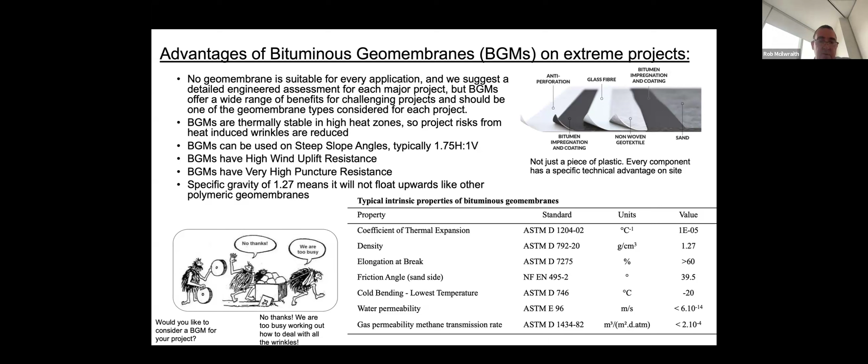Just a bit of a laugh there, but showing you some comparison between a polymeric membrane on the lower side of that project, and then the Coletanche BGM on the upper side, which is much steeper and also not having any of the wrinkles like that.

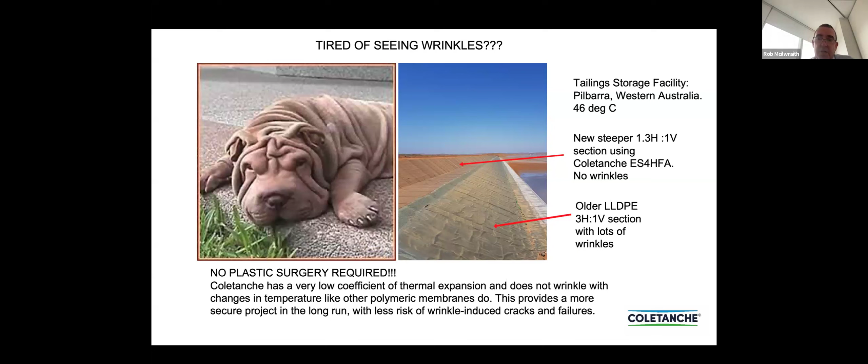This is an extremely hot project, 46 degrees Celsius. This is that same project in the Pilbara, very hot conditions, extremely hot and extremely steep. That particular slope is 1.3 horizontal to 1 vertical, so very, very steep.

In this case, it's a high friction angle variant where you remove a siliconized plastic sheet on the underside, and that sticks to the subgrade, so you can go very, very steep on these type of projects.

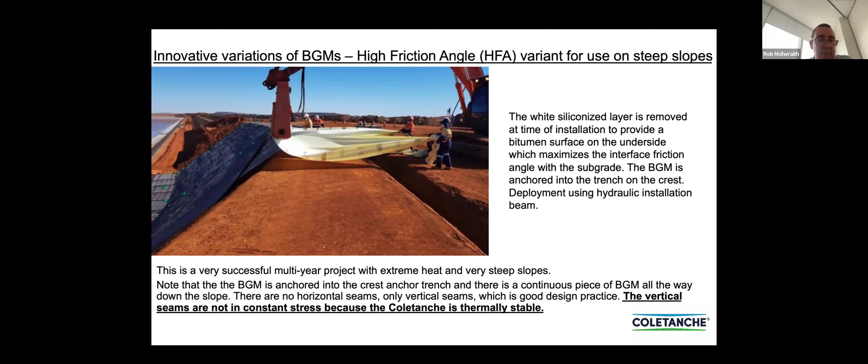Just another interesting example that we're seeing. This is a project that's been going on for quite a few years, right here in Australia. It's got more than 1 million square meters of Coletanche in it.

And you can see the steep slopes there - those are 1.75 horizontal to 1 vertical. You can see the people walking on the slopes. The sanded surface is really good for that, it's non-slip, and that obviously adds to the safety on the site.

In all these cases, all the seams you can see there in the center of the picture, that's a seam. They're all running straight down the embankment, so they are not under constant tension, even though there's high temperature.

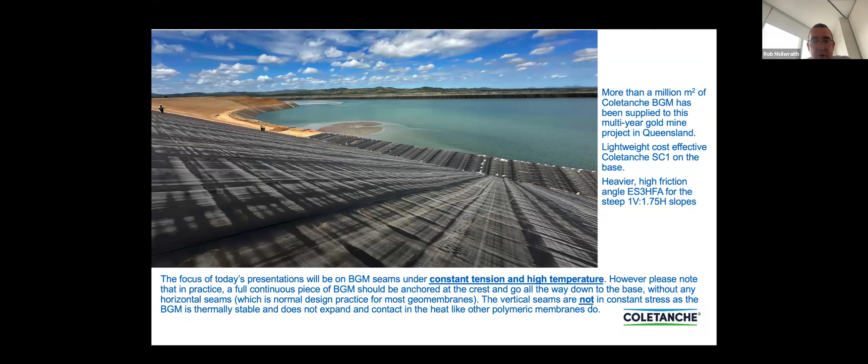Just to show you a few other projects around Australia, on the top left you'll see a project in Tasmania - you can see how easy it is for the workers to work on these steep slopes. On the top right, you'll see a project that's in central Queensland.

Very hot conditions - I've actually been on site there when it was 49 degrees Celsius in a heat wave. And that particular project is working beautifully, still 10 years down the line. On the bottom you'll see the Coletanche ES3 - these are big stormwater retention ponds. They're working beautifully. The BGM is selected because of its puncture resistance, thermal stability, wind uplift, and high specific gravity.

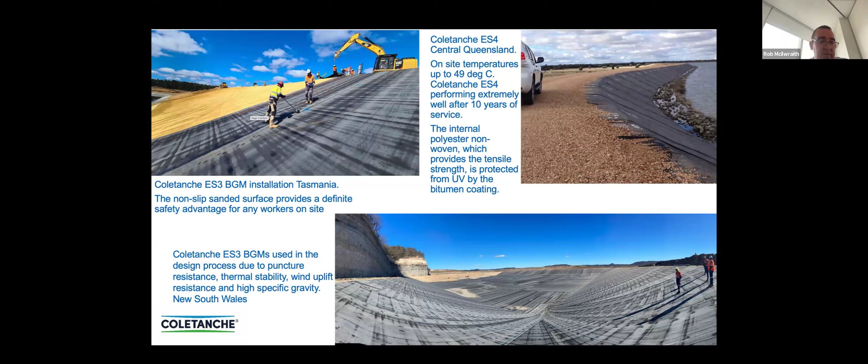We're going to be talking a lot about seams today, and there's a whole science behind the seams, and it does depend on the mixture of the bitumen that's in the seam. Obviously it's not just bitumen in there - there's a whole lot of additives as well, including SBS and some calcium carbonate, which stiffens up the mix. But it all depends on the composition of that. Bitumen is probably 50% of the mix, but it's a tried and tested method over many years.

So the typical one is a flame torch with a roller, and then you've also got electric welding machines. Both of them are working well, but typically you would like to see some flow of bitumen from the seam to ensure that you've got good coverage across that seam.

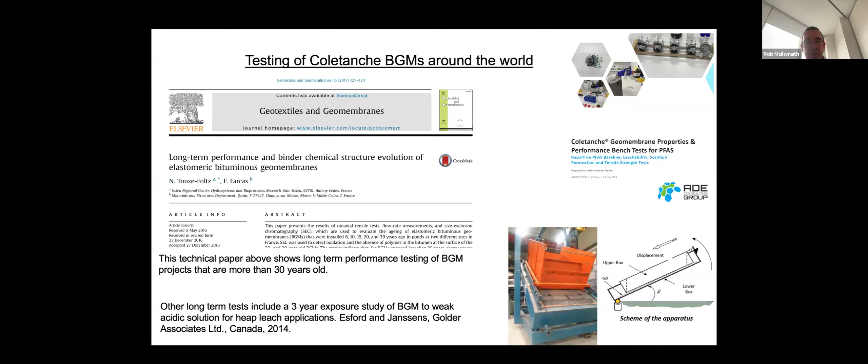Just to show you some testing that's been done around the world. We love testing that's been done - some of it's very favorable to us, some of it's challenging, so that's fine, we'll take it and we'll improve from that. But some of these tests show the long-term performance of BGMs over 30 years, and testing to other chemicals as well. So there's lots of tests, interface friction tests as well.

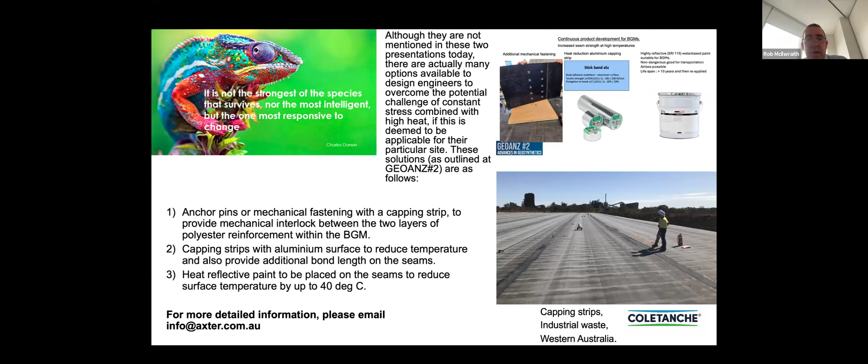Other ways to combat the problem, if you see it as an issue on site, is to reduce the temperature, which you can do with aluminium capping strips. Those capping strips reduce the temperature considerably, as well as increasing your bond length for tensile strength. You can also use highly reflective paint on the seams if you want to reduce temperature significantly. So there are lots of different ways to do that.

In general, BGMs have been used very successfully on lots of challenging projects around the world for more than 30 years. Thank you for your attention.

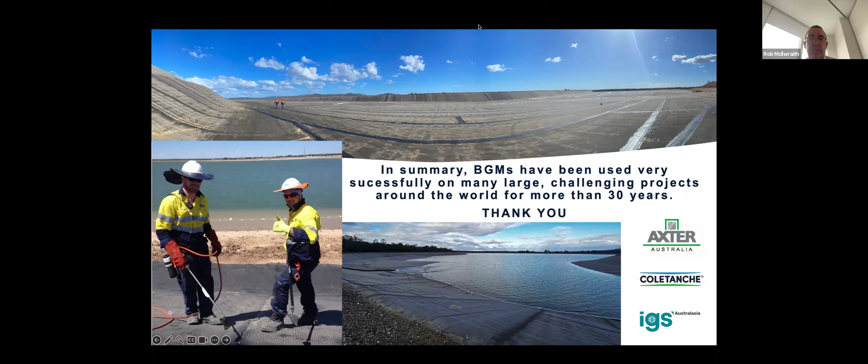So, am I sharing the right screen? Yep, okay very good. Thank you, Rob, for the introduction, so we have a good overview of the different projects, etc. So that's good. So again, I'm doing the first contribution, and Kerry Rowe will do the second contribution. So voilà, that's how we split the work.

So why did we work on this study, on BGM seams and seams in general? A lining is only as good as its seams. If the seams are failing, the lining is not going to work. So it's really something which has to be understood. We've been working in the geosynthetic industry a lot on polyethylene seams, and I'll come to that after.

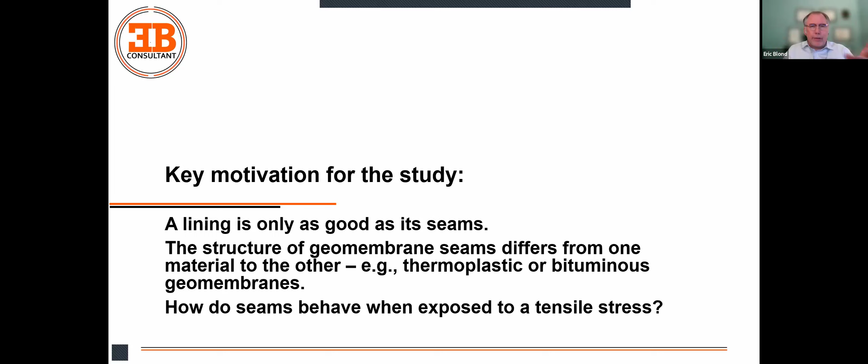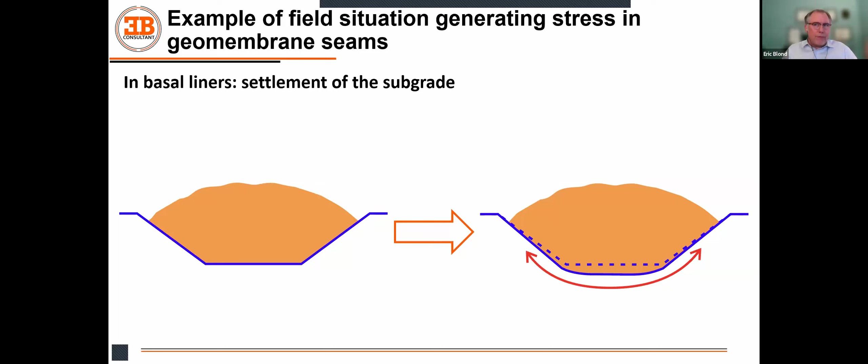So in which situations can we have tensile stress in a seam? In basal liners, one obvious one is if you have settlements of the subgrade, this will create an elongation of the liner overall, of the lining, of the line which constitutes the lining. Obviously that will create stress because of the elongation of the liner. You can also have settlement of a capping system - if you have settlement, you will have movements of the liner, they're going to move one against the other, and that will create again tensile stress somewhere in the structure.

Another way to look at it - and that will apply on very large surfaces as well - if you have a very large plane and it is creeping down, I would say, for different reasons, this displacement in the plane of the liner will create some lateral movement since everything is not aligned. That's something which has already been observed.

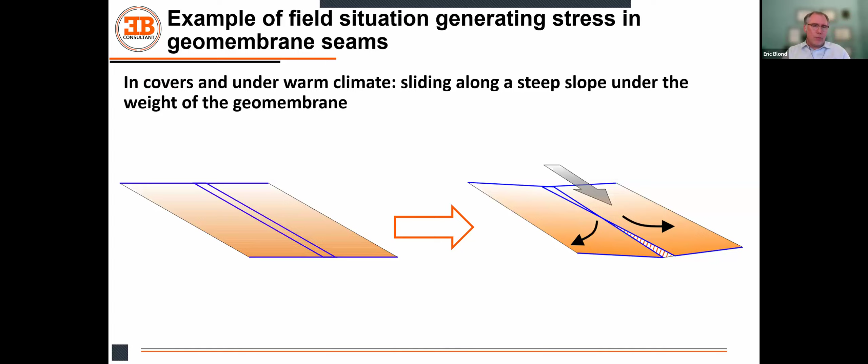So to go back on what we do - that's the situation where you can have stress. It's not specific to bituminous or polyethylene or anything, it's really a generic situation where you can have stress. There are many others - if you have hydrostatic stress because of gas or whatever on a membrane which is underwater, this gas can create stress as well.

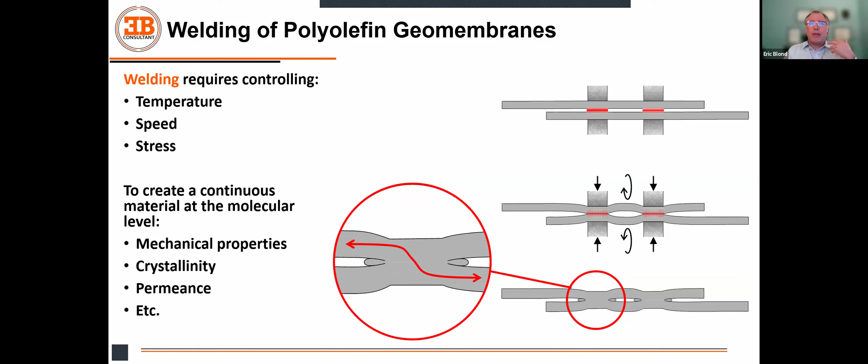So with polyethylene geomembrane, how do we weld the geomembrane? We have to control the temperature, the speed, and the stress which is applied on the two panels together. In doing so, we create a continuous material - we are aiming at creating something completely continuous from one layer to the other, going through the weld. In an ideal world, there would be no change of mechanical property, crystallinity, permeance, etc. It would be a really continuous structure, and if we manage to achieve that, we are getting the best possible assembly of a lining system.

So in ASTM, again, I'm the chairman of D35, so I'm totally thrilled to work on these improvements. We had two very important standards that were developed in the last couple of years.

One guidance is on how to weld polymeric geomembranes, because for a long time, 15 years or more, we have had the GRI GM19, which defines the performance requirement for a seam. But until this year we did not have guidance on how to actually do the seam. Now we have that, and basically it's how to combine heat, pressure, and speed, the three parameters, to try to obtain the best possible seam. A lot of work is still ongoing, and we're contemplating adding more criteria in the future.

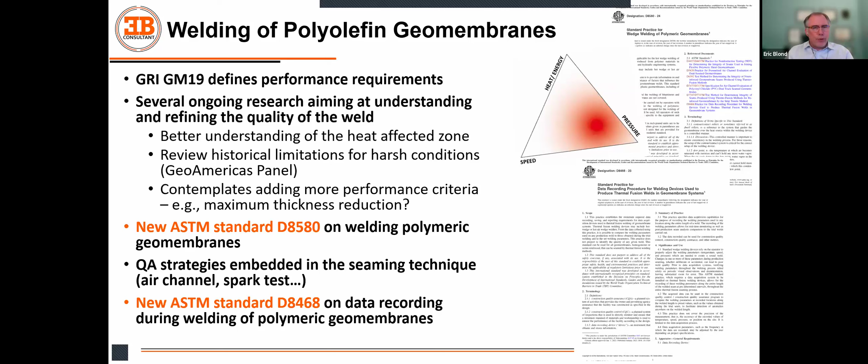We also have another standard that came out about the data recording procedure for welding. So there's a lot of work done on how to seam, how to weld, and how to document the weld, for bituminous geomembrane, which is a different product.

It's been used for a long time, and what's important to realize is that it's coming from the roofing industry. Basically, bituminous geomembranes are the grandfather of geomembranes. They've been around for a century or longer. First it was built-up roof, a traditional solution used in ancient history to make waterproofing layers, pouring bitumen and layers of fabric to build a roof. Then, innovation from the 70s brought prefabricated bituminous sheet.

They were sold in narrow widths, about 1 meter, and a lot of experience was gained with this narrow width, especially for welding. The technique to weld was refined, and it's working in roofs. My roof is bitumen, and half of the roofs around me are bitumen, so it's not something weird to see.

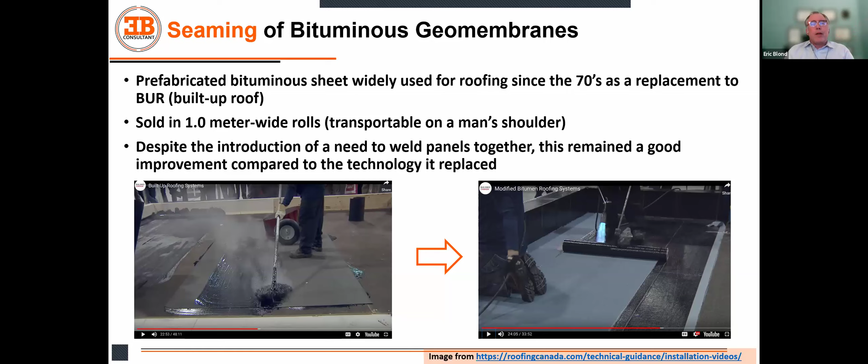We have to understand that despite the very high number of welds, because we have basically one seam for each square meter of material or more, due to the width of the rolls, this is working well.

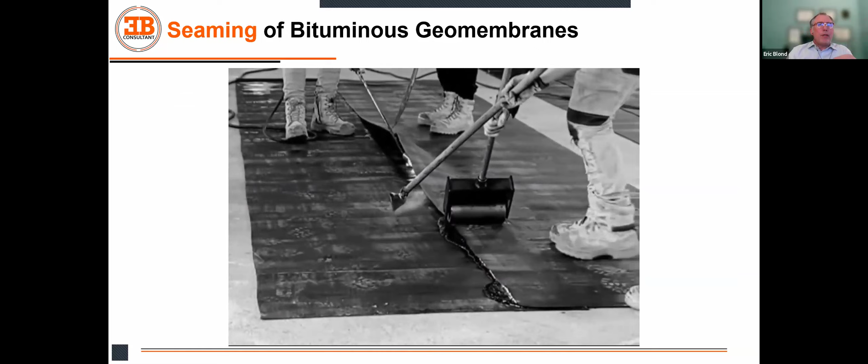This technology, which was used for roofing, was extended to geomembranes. This is an example of a bituminous geomembrane being welded. You can see temperature being controlled, the speed being controlled somehow, and the pressure being controlled. The three parameters are always important. You must control all three of them to get a good assembly.

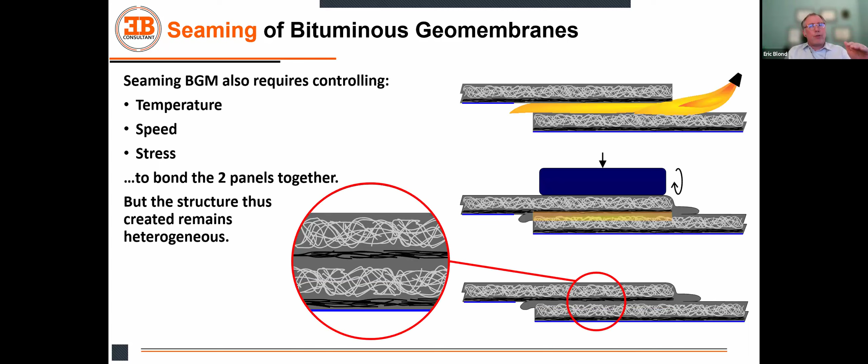So again, it's the same thing: we apply some pressure and we bond the panels together. But what makes the real difference between thermoplastic geomembranes and bituminous geomembranes? The bituminous geomembrane, even if it's assembled and seamed, will stay a heterogeneous structure. We will always have a layer of bitumen which is connecting mechanically the top and bottom layer. That means if we apply a stress across the seam, the transfer of stress from one side to the other is going to be through the bitumen layer.

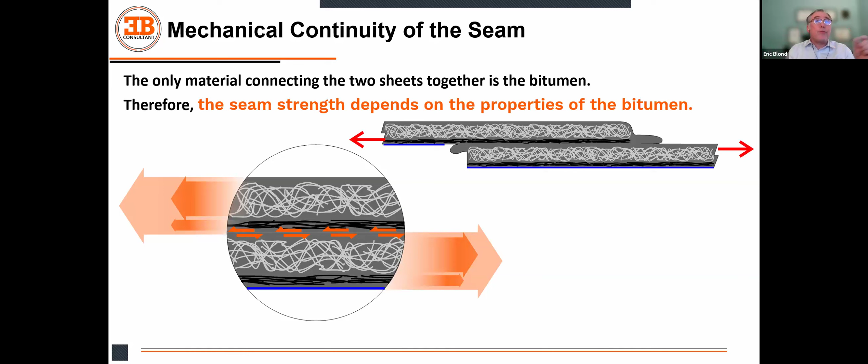If we look at the classical theory on viscosity, where the shear stress connects the viscosity of the bitumen with the distance between the planes and the strain rate, we realize that we could possibly apply the viscosity theory to the BGM seam. This viscosity theory was developed a couple of centuries ago, so it's really not something new, we're into well-known science.

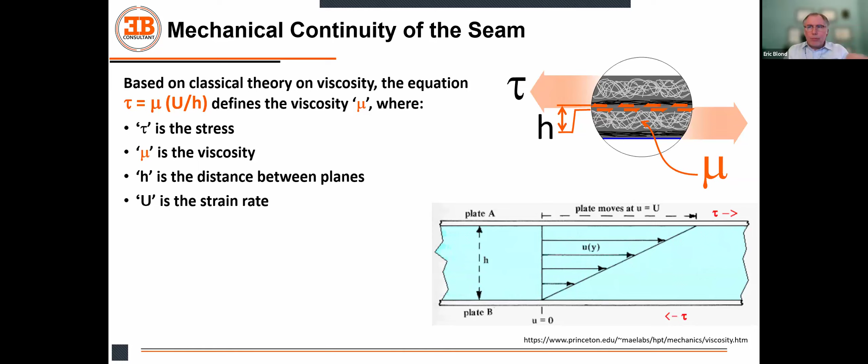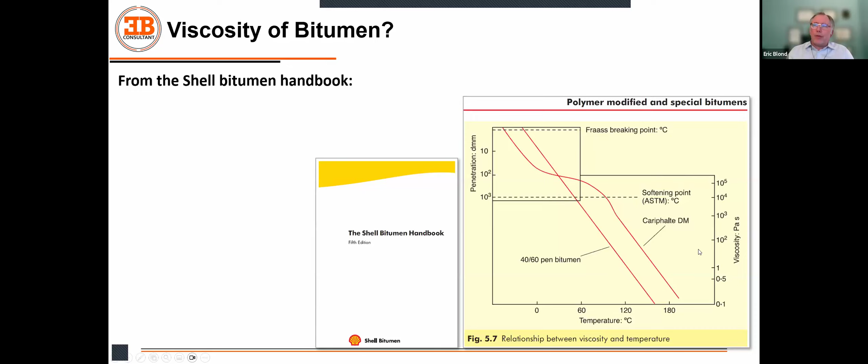So what is the viscosity of bitumen, and how can it affect the performance of the seam? If we look in the Shell Bitumen Handbook, which is the bible of bitumen used for pavement construction, roofing, and everything, we find a general trend connecting the viscosity of the product with temperature. The relation extends across the entire range of service temperature, and it is relatively linear.

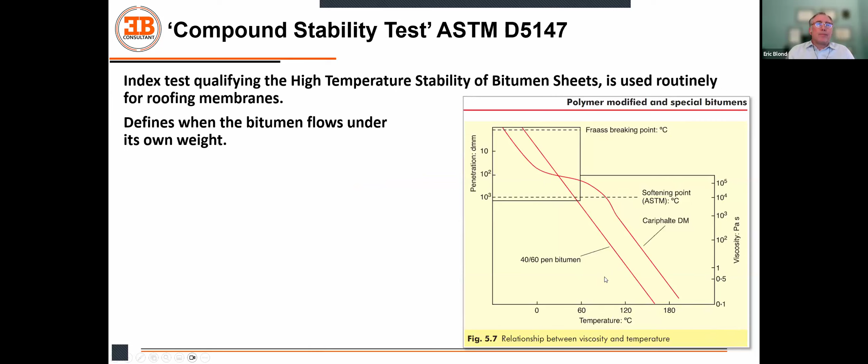Now, what is the limit to that? On the low end, the product can become brittle, like cold bitumen becoming brittle like glass at -30 or -40, it's going to break, like pretty much all products. On the high end, when you reach a high temperature, like 120 or so, the viscosity becomes so low that the bitumen can actually leak out of the product.

So at very low temperature, below zero, below -20, you can have a brittle product. At +125, it's liquid, basically. So what's happening in between is what we have to understand.

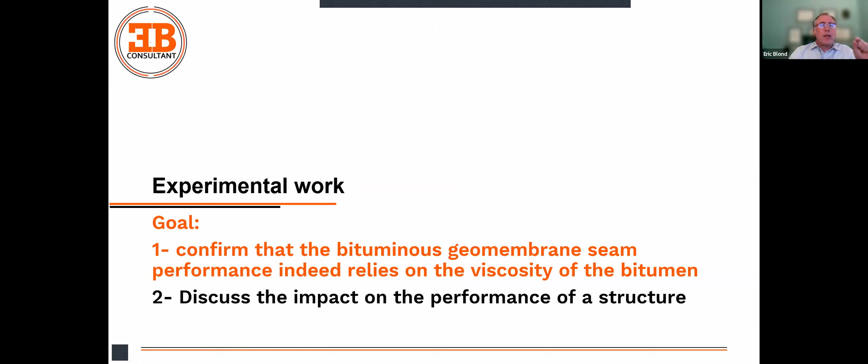So what kind of work have we done? The thing that we worked on was really to confirm that the bituminous geomembrane seams will indeed rely on the viscosity of the bitumen. Second, we wanted to discuss the impact on the performance of a structure.

So that's the film you've seen earlier, that's the sample we had. We took this sample and ran some tests, tensile tests per D7275, and seam shear strength tests per ASTM D7056, at different temperatures, and I will show you why we did that.

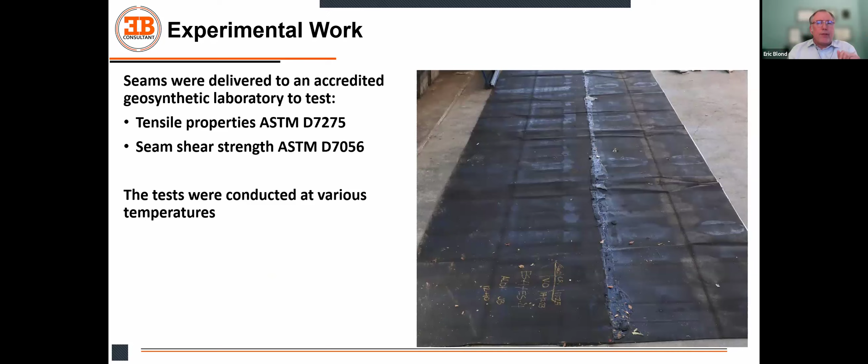What did we get in terms of tensile properties? That's really only the sheet which is exposed to a tensile stress. What we see is about 25% loss in sheet strength at 40 degrees Celsius versus the value measured at 23 Celsius. We lost half the strength at 60 Celsius, and 55% at 80 Celsius.

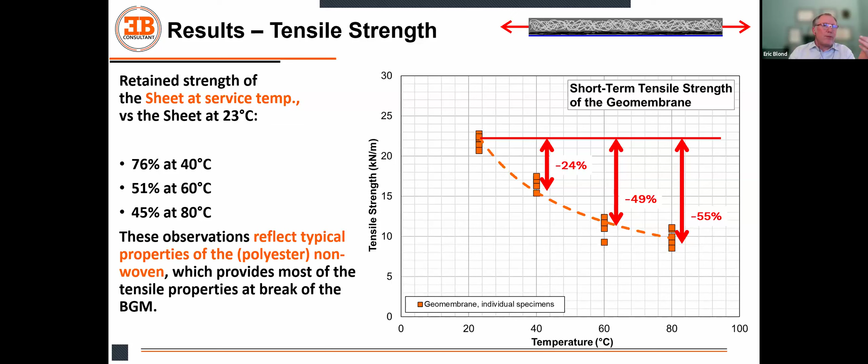And this is all very normal, because for any polymeric material, any product, we would observe something quite similar, whether it's polyethylene, polypropylene, or any other geomembrane. Temperature will affect the sheet strength of the product.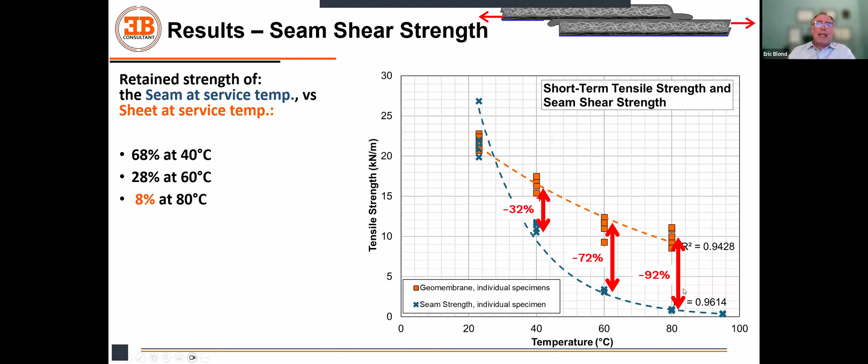You can see a reduction of 32% at 40 Celsius, an additional 72% at 60, and an additional 92% at 80 Celsius. So really, we can see a very steep change in seam strength property.

And if we compare it to the initial value, at 40 Celsius we have lost about half of the design strength of the product, that is the one we usually consider for the mechanical analysis, and it goes up to 96% at 80 Celsius.

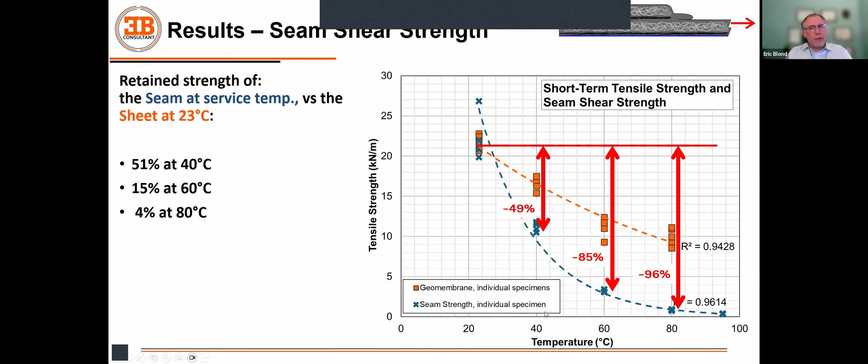So 80 Celsius is pretty on the high end. I'm not sure how often you would see 80 Celsius on a job site on a black liner, but 60 Celsius is pretty reasonable as an assumption, exposed to the sun. That's the range of values we could expect to see.

So clearly, at the end, the seam offers much less resistance than the sheet when exposed to high temperature. And what we found is that the relation between the seam shear strength and temperature is exponential, as you can see here. When we plot the numbers in a log linear scale, you can see a straight line, meaning there is a logarithmic relation connecting the two.

And we realized that it's in fact exactly the same shape of behavior as the relation connecting viscosity and temperature per the Shell Bitumen handbook. So this observation, just looking at the shape of the curves, really supports that the properties of the bitumen are controlling the behavior of the seam, and therefore the classical equation connecting viscosity with other parameters is in fact controlling the shear strength of the seam.

But all these tests were done under a fixed strain rate, which is what we do in a tensile tester — we apply a displacement, a crosshead displacement, so it's like a fixed strain rate. And if we change the strain rate, we're going to get different numbers of force. But either way, that's what we observed.

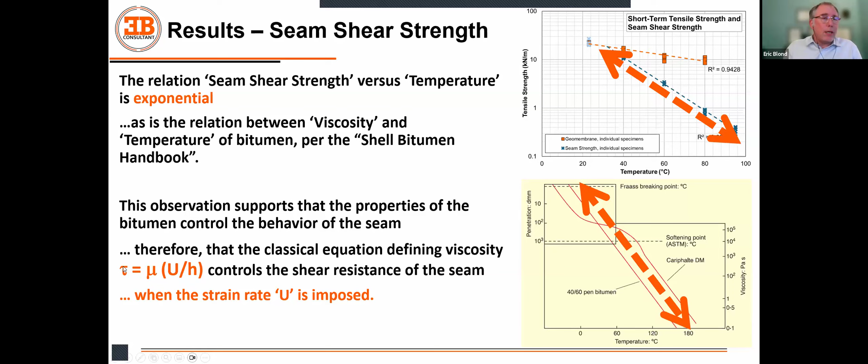We've modulated the temperature, which affects the viscosity, and we saw a relation consistent with this relation here for viscosity, for the seam strength. So in the field, such a strain rate is not something that can really happen. What's happening in the field is a forced elongation, and therefore it's going to be a stress.

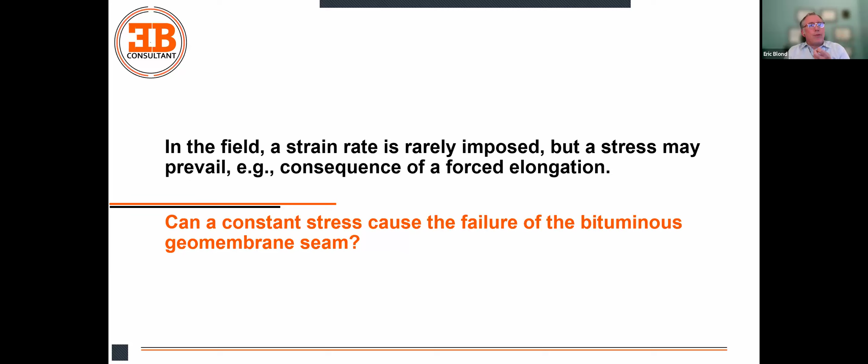So the question we had next is: can a constant stress cause the failure of the bitumen seam? This can be answered by conducting tests where a constant load is applied on the seam, observing the behavior with a creep test.

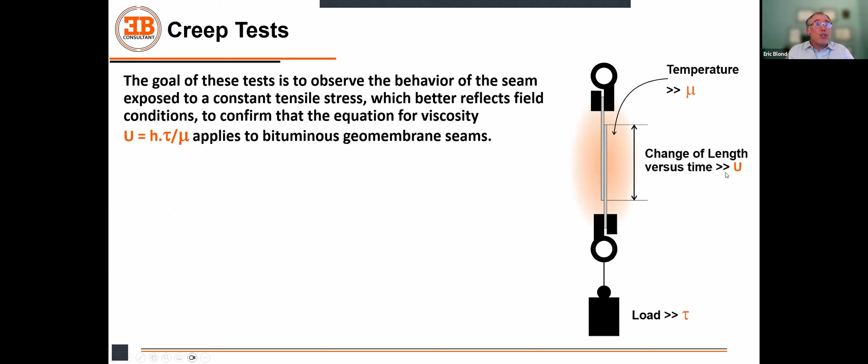So a creep test is a test where you control the load. You have a constant load, a constant stress, and what we want to see is how this constant stress is going to affect the change of length versus time, which is in fact the speed in that case for this equation here. So we set up a work plan.

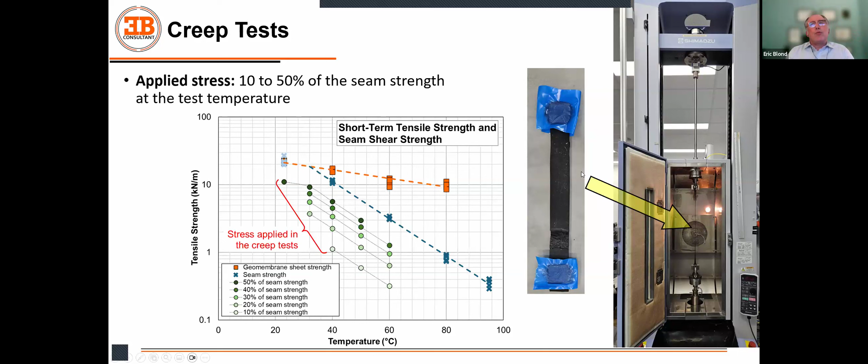So you can see here the environmental chamber. It's a closed loop system to control the stress. And we get the numbers, and that's the kind of results we get.

So here's an example with a test temperature of 40 Celsius, where we wanted to apply 30% of the seam strength, not the sheet strength. So from the initial force value of the sheet at 23 Celsius of 21.9 kilonewton per meter, that's the design value we would normally consider for the sheet, we reduce it to reflect the temperature of 40 Celsius. So we are down to 16.7.

That's test data. Then the seam strength that we get at that temperature is in fact limited to only 11.3 kilonewton per meter. So we apply 30% of this value, which gets us down to 3.37. So it's much lower than the initial value, but that still reflects the test condition that we've decided here.

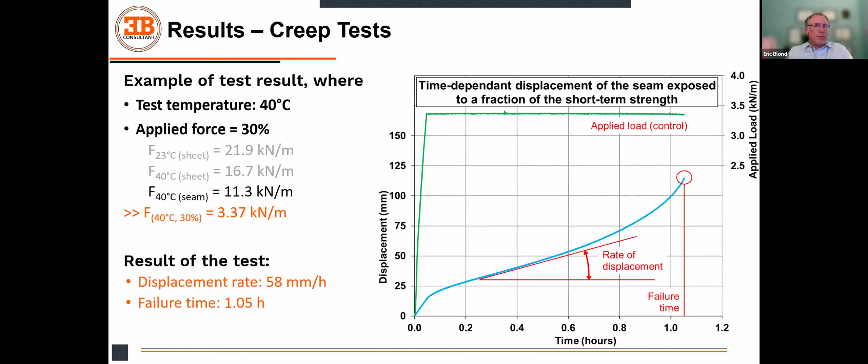And what do we get? A displacement rate that we can measure here, that's the slope of this curve, and a failure time, which is the time at which we have no continuity left. So the two panels have split apart, they're no longer connected together.

We tested all these conditions that I've shown you, and we got this cloud of data, numerous data connecting together the temperature with a rate of displacement, with a variety of percentages of the seam strength. And we confirm that again, there is this relation connecting together the speed of displacement, rate of displacement, so the U value in my viscosity equation, with the temperature for a variety of stress. So this really confirms that this equation does control the behavior of the seam.

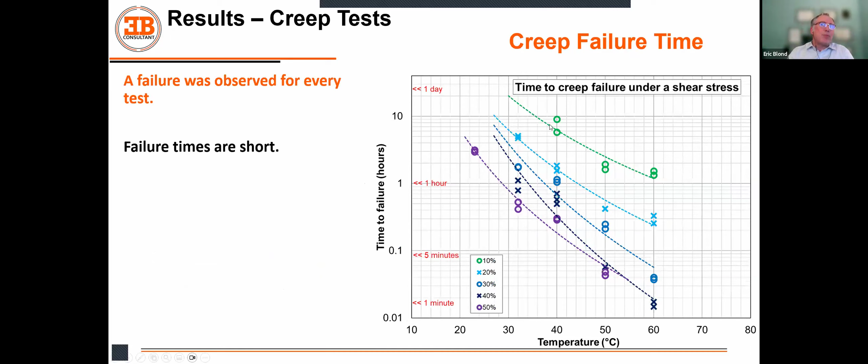We looked at the time to creep failure under the various shear stress, and we found that first, the time to failure were very short. So the green curve you have on top here is 10% of the shear strength of the seam at the test temperature. As I showed you before, that's already about 15% of the sheet strength. So we are very, very low. And we see that the failure times are pretty much very, very low. They are in days, if not hours, if not minutes.

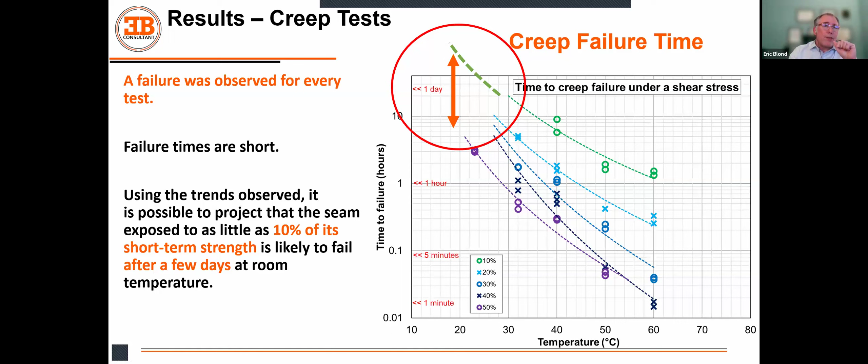So using the trends observed, what we observed is that with a stress as little as 10% of the short-term strength, it just takes a few days at room temperature to break.

And that to me was very interesting because I was working on this project for a couple of months, and eventually I found this paper by Kerry Rowe and his student, Mr. Francey, which they use a completely different approach, and they published this paper in May. So that was just a few months ago.

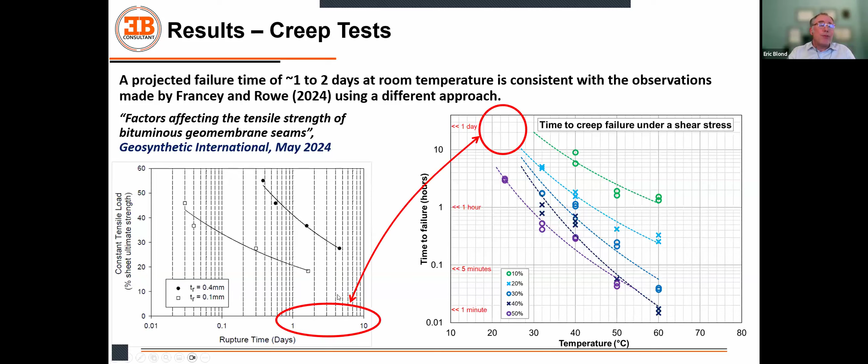And they published this document, this graph, which is connecting the failure time with a percentage of the tensile strength. And it's funny to see that they are also observing failure times in days for a percentage of the shear strength, which is between 10 and 20%, say. And this is completely consistent with what we have observed. So despite we did not use the same approach, we landed pretty much in the same ballpark. That to me was very, very interesting in terms of reliability of our studies.

So in terms of what can we get out of this? The existence of a relation between the failure time, from an engineering perspective as a geotechnical engineer, raises questions regarding the reliability of bituminous membranes when they are exposed to stress under any temperature, because we can see that there is a relation between the temperature and the failure time, but viscosity goes down to much lower temperature. So if there is a failure, it's going to be within hours or days.

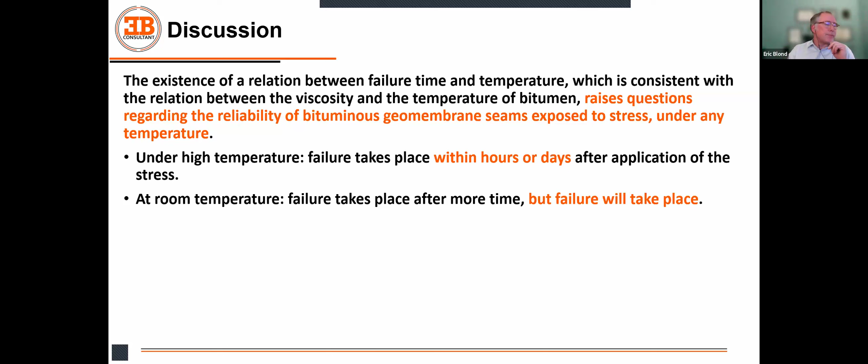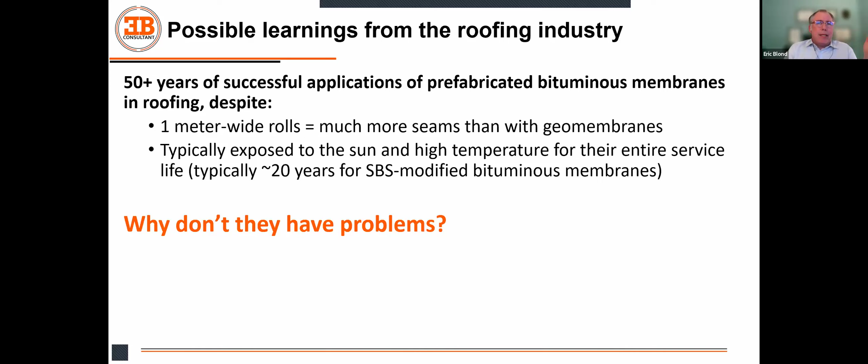Now, what can we learn from the roofing industry? Because in the roofing industry, they have no problem. They've been using these products for many, many years. What makes the big difference?

First, a very important aspect: roofing products use two layers, welded one on top of the other, a base sheet and a cap sheet. The base sheet is attached to the roof deck with mechanical attachment or full surface adhesion, and then the cap sheet is bonded after. So the joints are always covered by another panel. I'll give you the link to this information if you're interested.

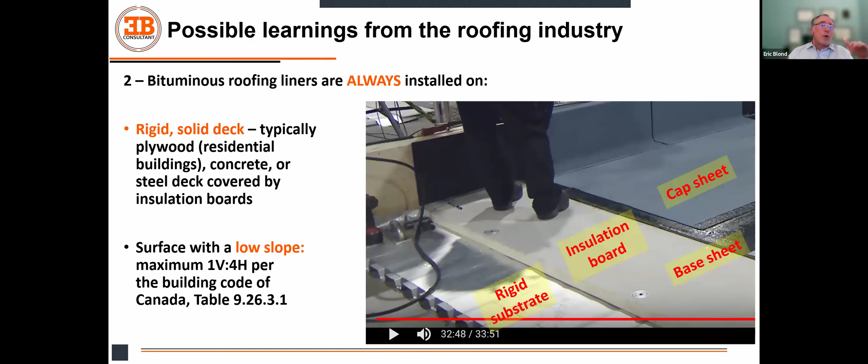Second, the membranes are always installed on a rigid, solid deck, usually plywood or insulation material. It is very rigid and stiff, not soil. Third aspect: low slope. The building code of Canada forbids installation with slopes greater than 1 to 4. Canada is not Australia, it's much colder, but we have hot summers. That's based on experience, it's a code requirement, and it's well accepted in the industry.

So if we compare the structure of a roof and bituminous membranes, that's really the difference. The base sheet on a roof is attached mechanically or by different systems to a deck, and then we have a second layer on top. In the case of a bituminous geomembrane, we have a single seam to which we entirely rely for the waterproofing.

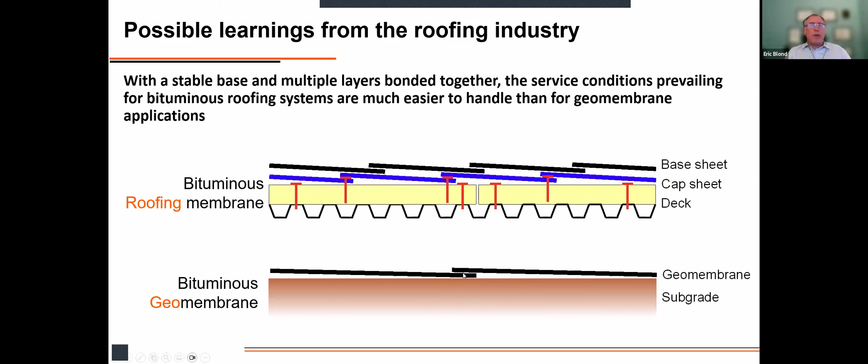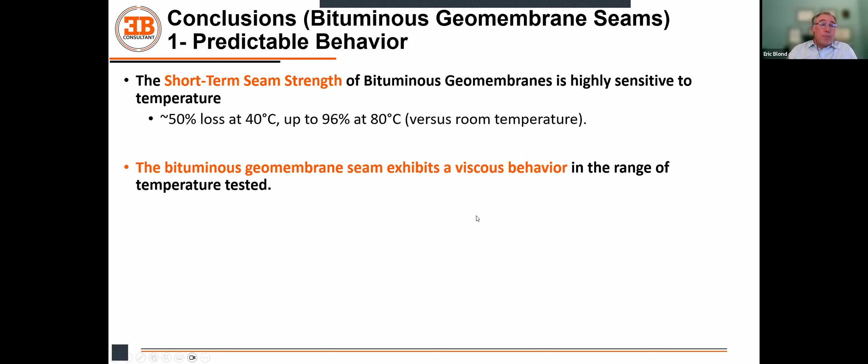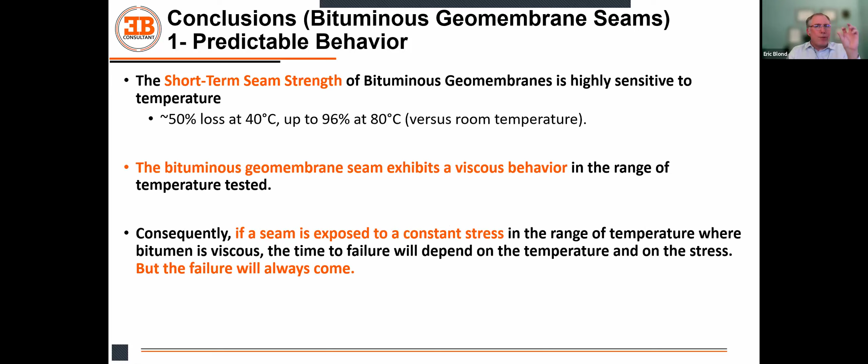It's a big difference. Conclusions, and I know I need to be quick. The short-term seam strength of bituminous geomembrane is highly sensitive to temperature. The bituminous geomembrane seams exhibit a viscous behavior, and the main consequence is that if a seam is exposed to constant stress, it will eventually fail. It must not be exposed to constant stress because of the physics of the material.

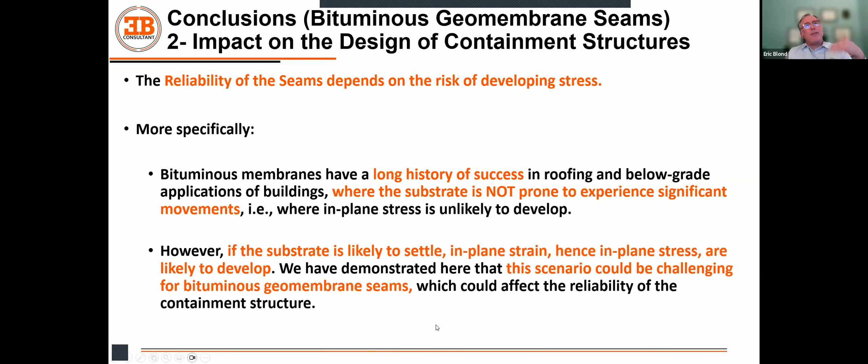Impact on the design: the reliability of a seam will depend on the risk of developing stress. If you have a deck, there's no problem; there's a long history of success you can piggyback on. If you install the bituminous membrane on a concrete deck, the seams are not going to move. But if the substrate is likely to settle, or there are movements or tensile stress developing, then the deck isn't there anymore, and stress and therefore failure can happen.

With that, one recommendation I came up with - probably my ASTM hat speaking - is that welding should probably not be used for bituminous geomembrane, because welding refers to a complete set of concepts which are not met here. Sealing would be a much better solution. Bitumen is a fantastic sealant, used in many industries for sealing. Indeed, on the seams, we should consider that they are sealed, not welded.

So that's really my contribution for today. I will leave it to Kerry to provide us with more information and more research.

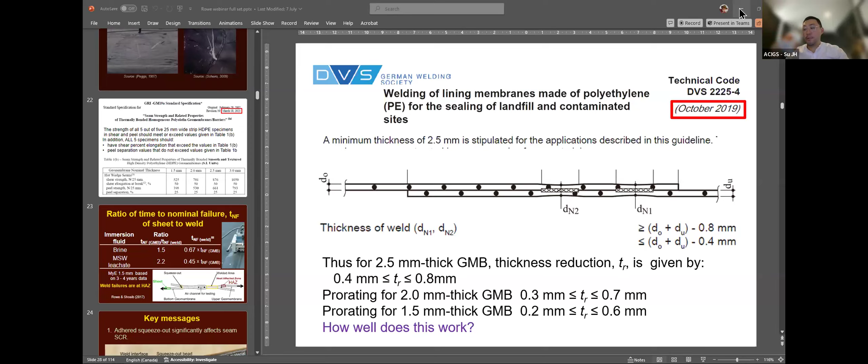Kerry, you're on mute. Can you see my screen? No, not yet, it's not coming up. Okay, let's try this. Right, it's coming up, but we're not seeing the presentation part, we're seeing the PowerPoint. You're seeing the proper PowerPoint? Okay, I'm just going to fiddle with this, and I'm ready to go. Kerry, sorry to interrupt, we're seeing your slides but not the PowerPoint presentation. Oh okay, I have to go back and reshare. Let's see here. Stop sharing. Okay. Now are you seeing my screen? Yep, that's all good, much better.

Yep, okay. So I wasn't lying in bed dreaming one night that I needed to look at geomembrane seams - independently from Eric, we'd been looking at the same issue. We had a number of consultants come to us and say, we're having problems, we don't have much science behind this, we're being asked to use them by our clients, and we're being told to take responsibility. So can you get some science? And that's really what launched us into studying BGMs.

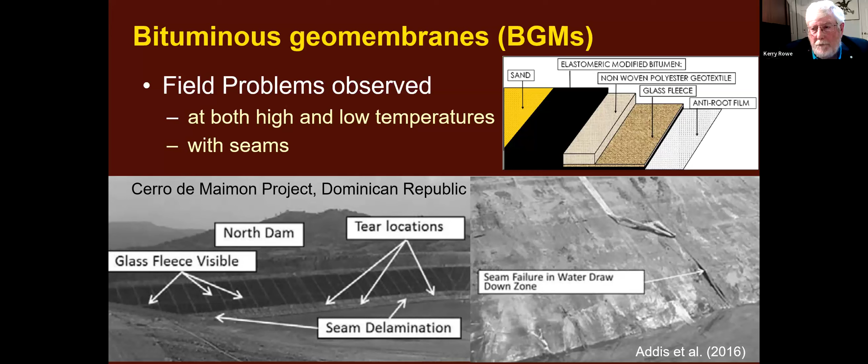So we're talking in particular today about the seams. And here's a photograph in the field of a problem with seams. And as Eric pointed out, even though we should never be designing any geomembrane for sustaining tension, we can't avoid the fact there's going to be some tension.

There's going to be tension if you've got some undulations and you've got water pressure acting on it. You've got down drag when you've got a waste that's consolidating like tailings. You can get water and gas pressures underneath it, differential settlement, melting of ice. Is not perhaps too much of a problem in Australia, but melting of permafrost is a big issue in Canada.

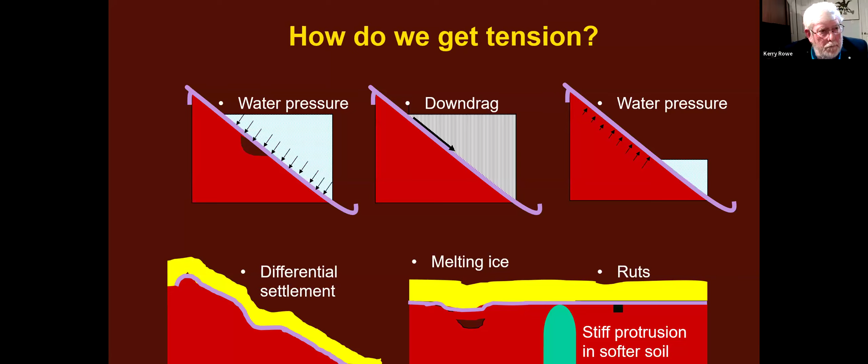If you've got a stiff protrusion and soft materials around it, or even just simple little ruts that are in the subgrade and you bridge over it, it's all going to induce tension, which will be particularly problematic if you've got a weld going across it. That is true irrespective of the material, because welds are the weak point.

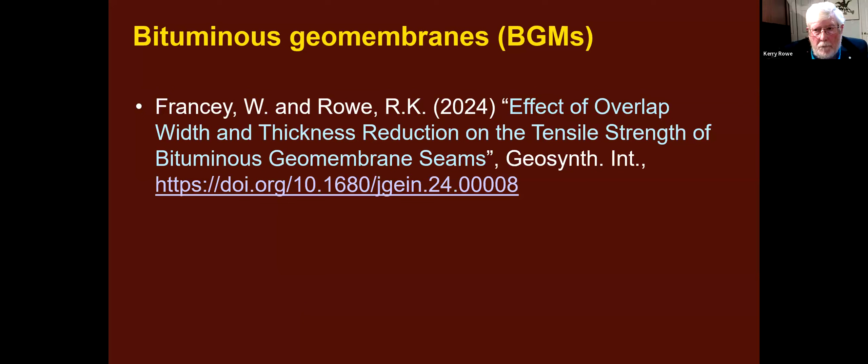Now, we have two papers. Eric referred to one of them with Francey, and we have another one that's come out recently with Fan.

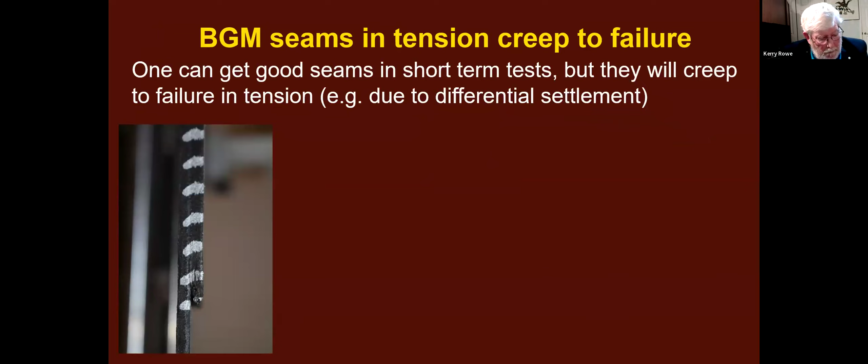This is one of the first things we did, very simple. We took a BGM that was welded, we painted some white horizontal lines across the weld, and we subjected it to a sustained tension. And with that, we began our monitoring, and we saw after a short time, those white lines were no longer horizontal, and it was starting to open up at the bottom.

Longer, the lines aren't even connected anymore, and it's opening more. And a little time later, it fails. Same story that you just heard about from Eric.

So let's quantify this, and we took a different approach, but nevertheless came back with the same or very similar results. We tested 2 different BGMs from 2 different manufacturers, and we subjected them to a constant stress as a proportion of the sheet stress. And all of these welds were within 10% of the sheet strength.

Many of them were as good as the sheet strength in a short-term test. And so they were good welds that we started with. We did do some tests on not such good welds, and it really didn't make much difference. So here you see the data for 2 different BGMs from 2 different manufacturers correlating very well.

And you see that if we go to 30% of the strength of the material, it failed in 0.1 of a day.

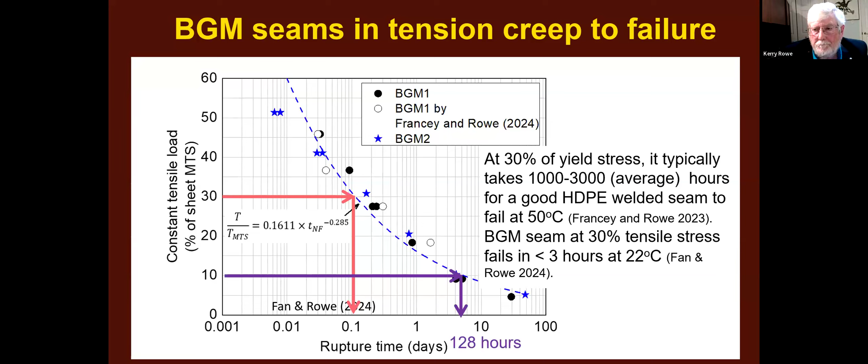And that's because the higher load gives you more creep. And eventually it fails in a brittle manner, but it is creeping for much of that time.

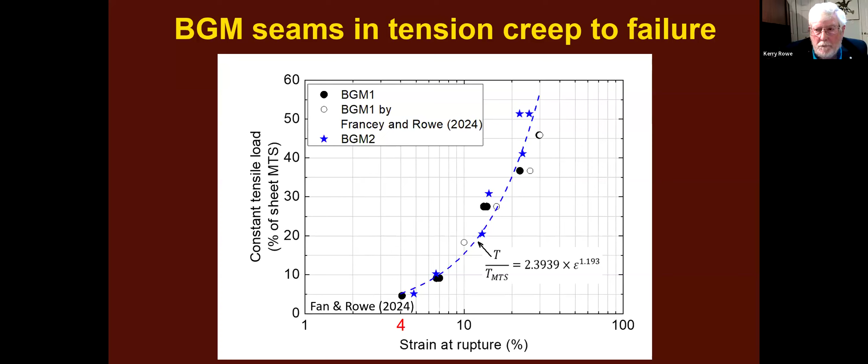So those are all in isolation. So we thought, let's try simulating what may happen in the field. We've got an indentation 75 millimeters deep, 150 millimeters wide at the bottom. It's in a sand. We put a BGM with a weld on top of it.

We put a geotextile, we put some sand on top of that, then a geotextile, then some gravel. And we can apply loads. We can also apply water pressures in our geosynthetic liner longevity simulators.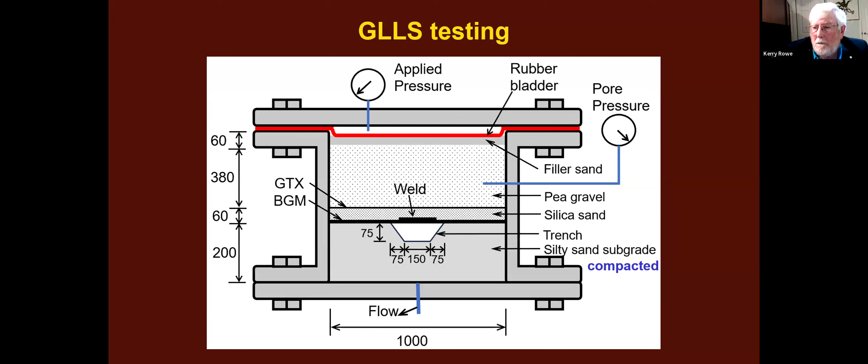So here's what it looks like within the cell. And you can see the indentation is 600 millimeters long.

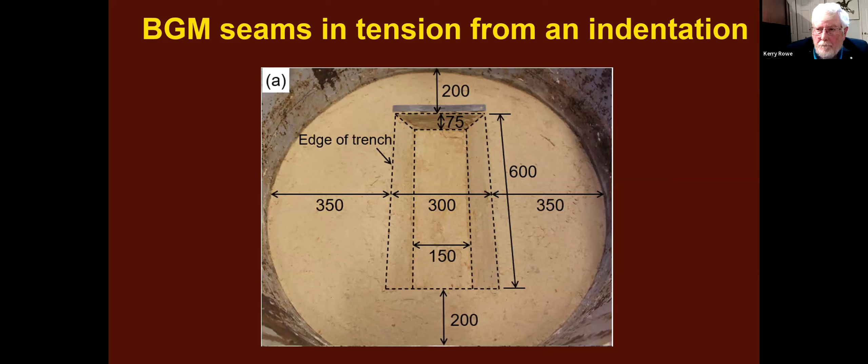We started pretty carefully at a low stress, 20 kilopascals, so about 1.2 meters of cover soil in terms of the weight acting on it. We applied a water pressure as if the water was at the top of the sand, about 12 kilopascals or 1.2 meters of head. In this case, it sat there. It didn't leak for about 24, 25 days.

Then it suddenly started to fail. Within about 2 days, it had gone from basically zero leakage to 200 litres per day per metre of head. That's for a 600 millimetre long divot. In fact, the opening up was 500 millimetres long, as you'll see in a moment.

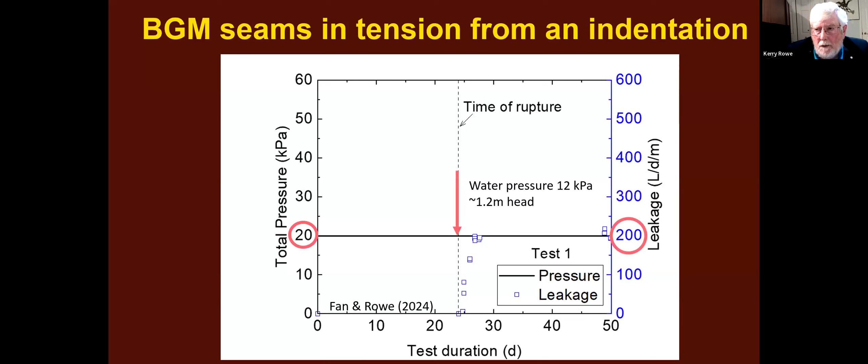Just to recap, 20 kilopascals of applied pressure is where it ruptured, giving 200 litres per day per metre under 1.2 meters of head, not a large head. This is turning the seam upside down, so you're viewing it from the underside, and the rupture length was about 500 millimeters. It obviously began at one location and then propagated, which you infer from looking at the rate of increase in the leakage.

Here are results from another test, and we started at 30 kilopascals. We sat there for a few days, 4 to be precise. Then we increased it fairly quickly up to 50 kilopascals and let the load sit there. Almost immediately, 0.04 of a day after increasing from 40 to 50 kilopascals, we saw a failure. The leakage began at about 200 litres per day per metre and increased with time. When we decided to terminate the test after about 46 days, it was about 525 litres per day per metre of head, under 1.9 metres of head, 19 kilopascals in round numbers.

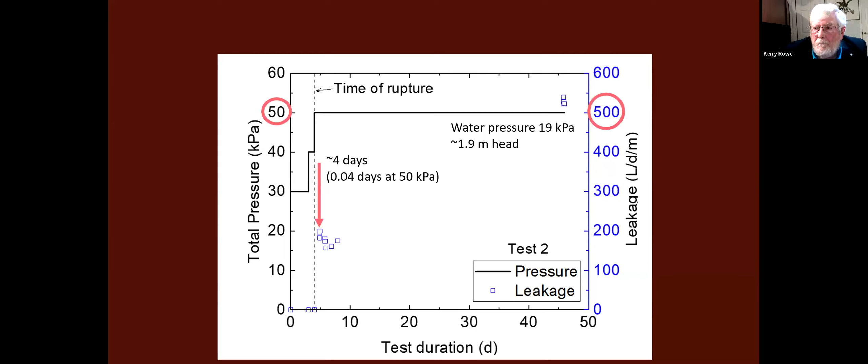So here is a roll of BGM. What I did for this table is go to the literature and pull out the data sheet for a commonly used HDPE and one for a BGM. It was a 2 millimeter HDPE with a mass of about 1.9 kilograms per square meter, a roll width of 8 meters, a roll length of 105 meters, and it's pretty simple math to calculate that means you'll have about 1,500 meters of seam per hectare, just considering the ends and edges of the rolls being seamed.

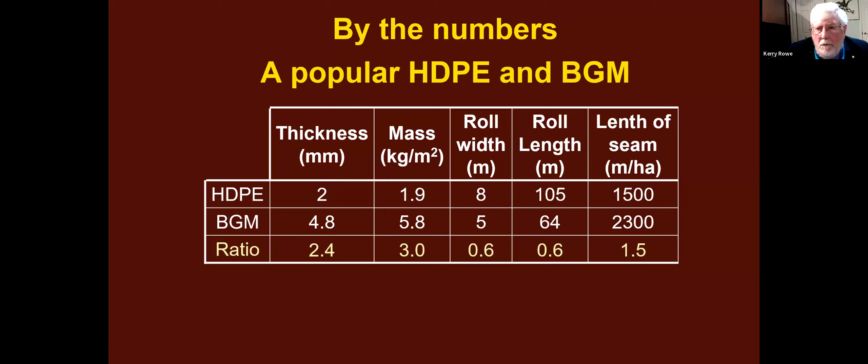That's without any additional patches being considered. We do the same thing for the BGM. Its thickness was 4.8 millimeters, and as you've heard, they are substantially thicker and heavier at 5.8 kilograms per square meter. The roll was 5 meters wide, 64 meters long, and that gives us 2,300 meters per hectare, or about 50% more welded distance with the BGM I picked for this example and the HDPE I picked for this example.

So let's carry this one step further and look at the time to rupture at 30% yield. For the HDPE, it took 125 days. For the BGM, it took 0.1 days. So there's a 1,250-fold difference. There's also a big difference in temperature, but we'll come back to that later.

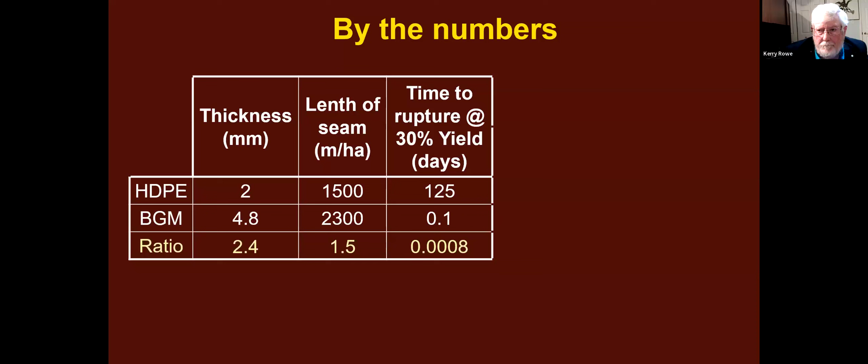Next, let's look at leakage. We've done the same types of GLLS with geomembranes, with welds that are defective on geomembranes that are HDPE. We've done them on BGMs with defective welds and with not 100% welds, in the 80 to 90% range. The extreme case we've looked at for polyethylene just wasn't welded at all. We can compare the leakages in as similar cases as we've got. We don't compare the same cases because we just didn't have the data.

This wasn't done for comparative purposes, but if we look at the HDPE, we're dealing with much higher stresses. We applied 300 kilopascals, and our leakage in terms of litres per day per metre of seam that's failed, or was never proper in the first place, per metre of head—we take the leakage, divide it by the number of days to get a rate, divide it by the length of the defect, and divide it by the head. That gives us 0.2.

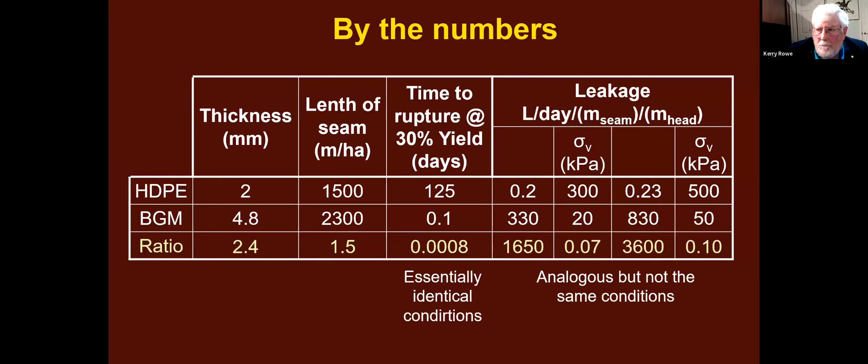If we now look at the BGM, we only tested at 20 kPa. These are not apples-to-apples comparisons, but our leakage is 330, or 1,650 times higher. We go to 500 kPa—in our HDPE case, our leakage is 0.23. We go to 50 kPa, it's 830 for the BGM as our leakage. In normalized terms, that's a 3,600-fold difference.

Now I'm going to finish off by putting this in context. If we have a composite liner in a landfill, we know from double-lined landfills, and this data you see here, that if we have an electrical leak location survey, the leakage is typically less than 250 litres per hectare per day. Now, I'm just giving you that as a benchmark.

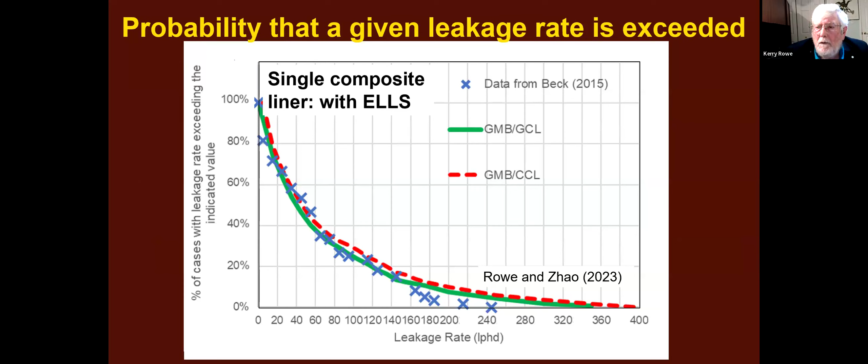I'm now going to be talking in litres per hectare per day. So we go with our 2 millimetre HDPE, and we assume 5 metres head, in a pond or something. And we assume that 1% of the seams fail. Now, we don't expect all the seams to fail, 1% is not a very large number. And we get a leakage of 17 litres per hectare per day.

If I do the same thing with the BGM, using the same data set we saw before, it's 95,000 litres per hectare per day. Now, you could say that's a bit unfair because 1% of 1,500 is less than 1% of 2,300. So let's compare them for 15 metres each, and you see 17, of course, for the HDPE and 62,000 for a BGM.

Now, the point I want you to recognize is in a dam or a freshwater reservoir, nobody'd be worrying about 95,000 litres per hectare per day. You wouldn't notice it. It's no more than the evaporation. You certainly wouldn't notice 62,000. It really doesn't matter.

But if you're trying to contain a contaminated liquid, that becomes a rather different story.

So let's wrap this up. Geomembranes don't like to sustain tension, no matter what it is. HDPE seams will fail in 40 to 125 days, depending on the quality of the seam, at 30% of the yield, at 50 degrees C in a surfactant. And we typically want those seams, in fact the sheet, to be less than 6% strain.

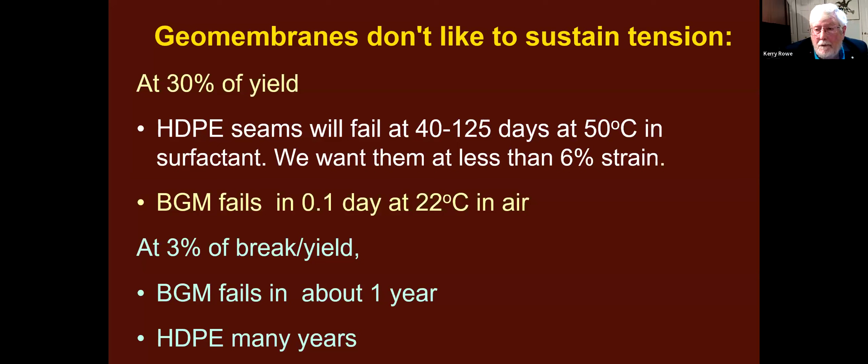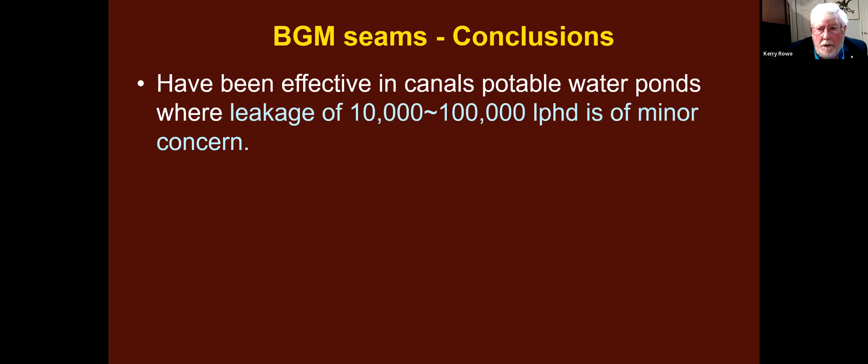So BGMs can be very effective. You heard at the beginning, they've been used on lots of applications, particularly when you're not too worried about 10 to 100,000 litres per hectare per day, which is your typical reservoir freshwater application. You've heard that they're easier to seam. You've heard that they don't stress crack and they don't wrinkle, and they're all true. But it's only part of the story.

Whatever the material is, whether it's PVC, HDPE, LLDPE, BGMs, or whatever else you want to talk about, you've got to look at what the potential failure modes are, what's the allowable leakage, and what's the service life when you're designing, and take all of those factors into consideration. And we should be designing on facts, not wishful thinking. Luck is fickle.

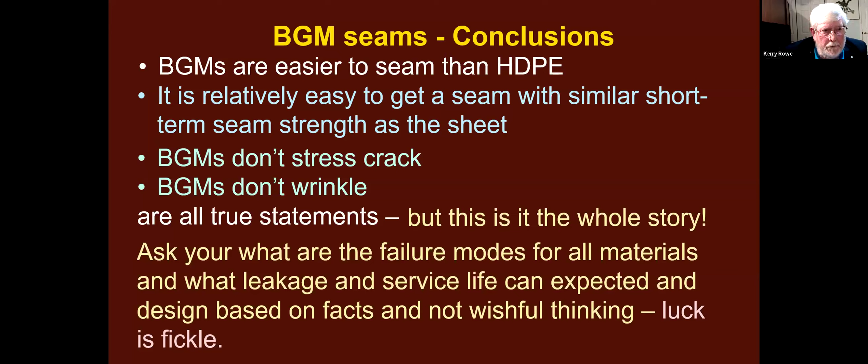So, great for water, but carefully consider if you're going to be containing any fluid where a leakage of 10,000 litres per hectare per day is high.